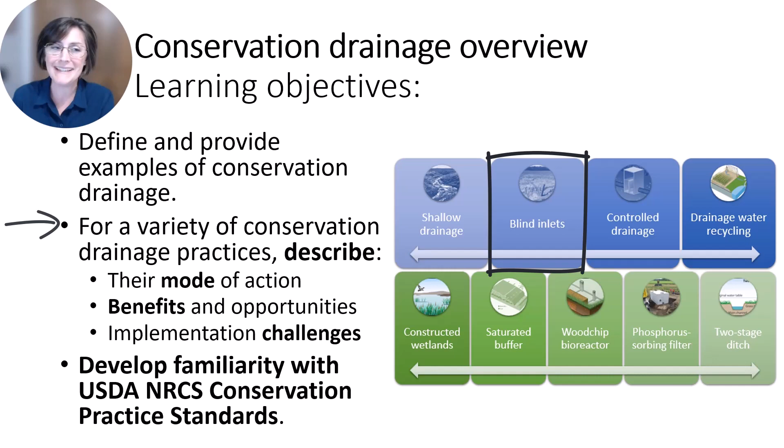We'll move on to our next conservation drainage practice, the practice of blind inlets. We'll also touch on the topic of NRCS standards. We talked about surface inlets, surface intakes, tile risers in previous weeks.

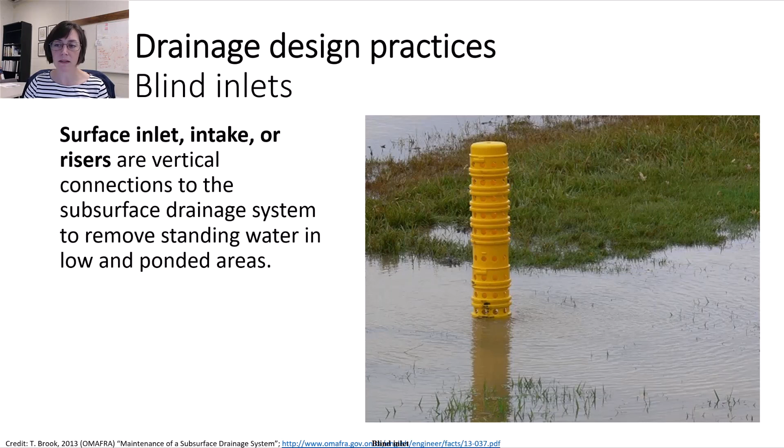The point with a tile riser or a surface inlet is that these are critical parts of our drainage systems because they're essentially direct connections from the surface of the field, from ponded areas, straight down to the tile drainage or the subsurface drainage system. That allows the wettest parts of the fields to drain relatively more quickly than if you did not have that

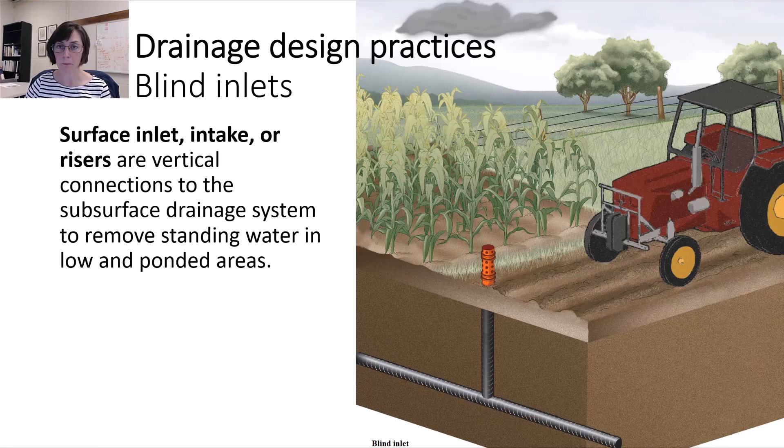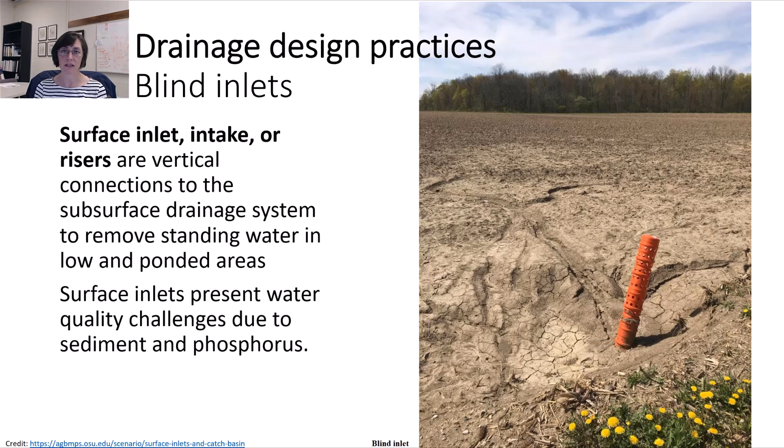direct connection there. Surface inlets also present challenges for water quality though, mainly because this is one of the main ways that sediment gets into our tile drainage system, which of course tile drainage water tends to be relatively clear unless you have a surface inlet present on your drainage system. In addition to sediment, we have sediment-bound phosphorus or particulate phosphorus that can get into our tile drainage system in this way.

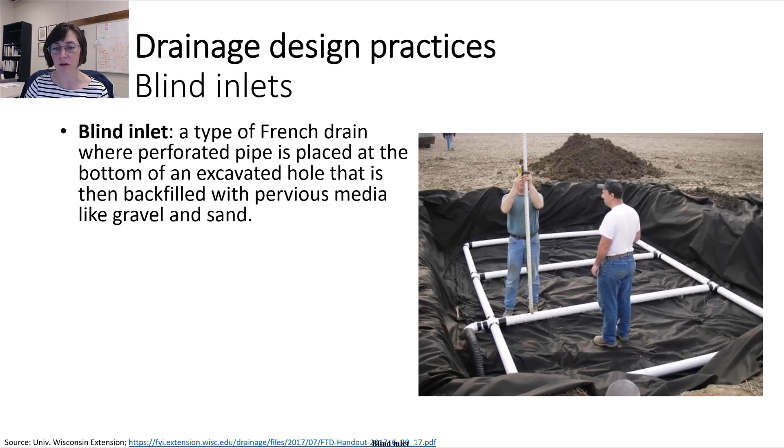So enter the practice of a blind inlet. A blind inlet is a type of French drain where a perforated pipe is placed at the bottom of an excavated pit that's then backfilled with pervious media like sand or gravel. The best way to describe this practice is to just walk through the construction of a blind inlet.

First, an excavation is made in the field around where the existing tile riser or surface inlet is, and you excavate down to the level of the drainage system. A geotextile fabric is usually laid in the bottom of the excavation, though that's not shown in this picture. And then you lay the collection pipes on top of that geofabric.

Those collection pipes you see in the picture, you can just barely see some holes in those collection pipes. This is the collection system to collect that surface ponded water that's infiltrated through the soil, collect that and route it into the subsurface drainage system.

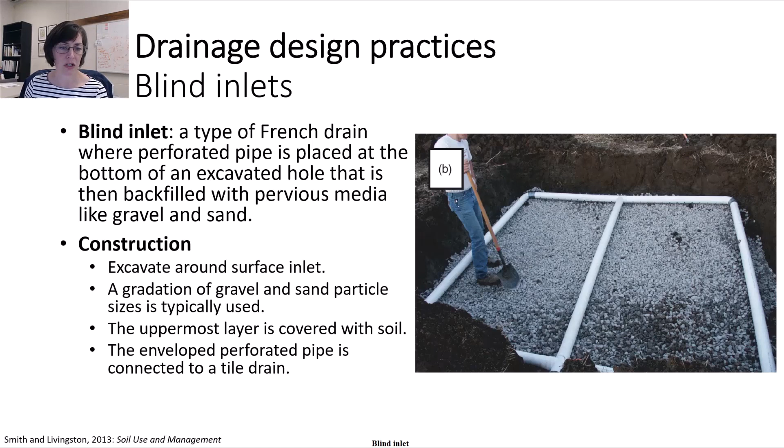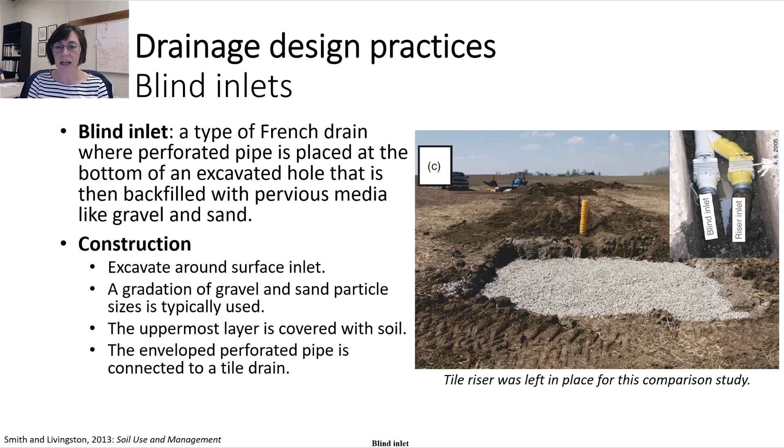On top of that collection system, you fill with gravel media, typically with coarser media, the bigger gravel at the bottom, and then smaller media as you fill up towards the top. And then for a blind inlet, the top is covered with soil. Obviously, that's easy to remember because once the blind inlet is done, we are essentially blind to seeing any kind of inlet because it becomes invisible in the field.

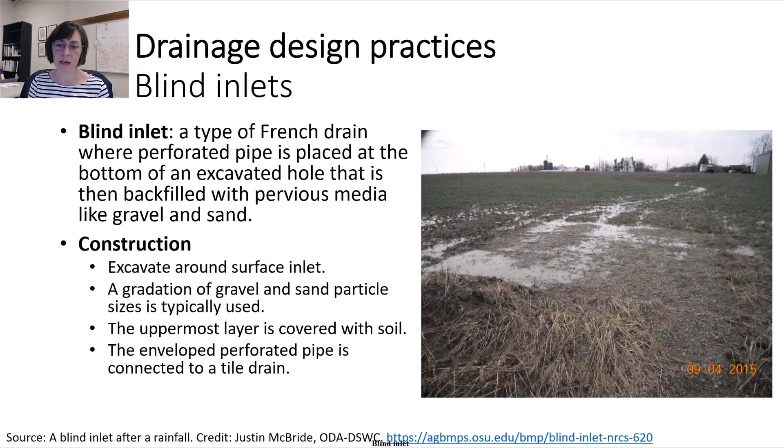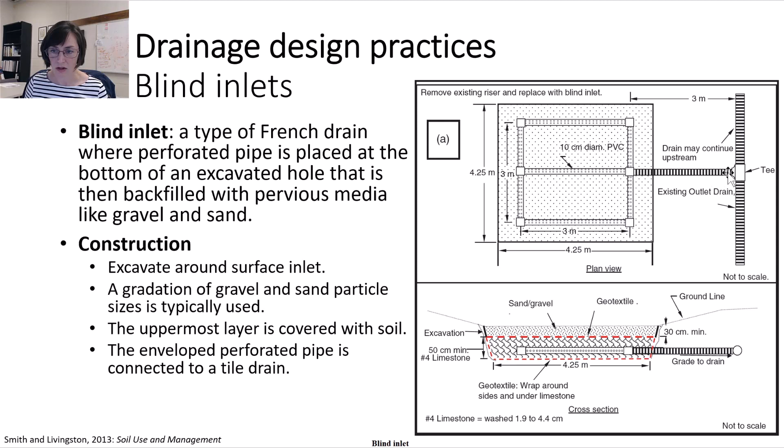Geotextile generally is used to separate the top sand or gravel layer from the soil, which goes on the very top of the blind inlet, and this illustration illustrates all those concepts nicely of the different media that are required. And of course the plumbing is all connected along the way into the larger existing drainage system.

The terms gravel inlet and blind inlet are often used interchangeably, although they are technically different practices. The difference is that at the time of construction of a gravel inlet, the uppermost or the top layer of gravel or sand is left exposed. You don't cover it over with soil. That's opposed to a blind inlet where you cover the top over with soil, so you don't really physically see anything in the field in terms of the inlet.

However, with a gravel inlet, when you leave the gravel exposed at the surface, over time the sediment that's coming from your field, from the surrounding depressional area, will cover over the gravel. So over time, gravel inlets essentially turn into blind inlets, but they are considered distinct practices because at the time of installation or construction, the practices are different.

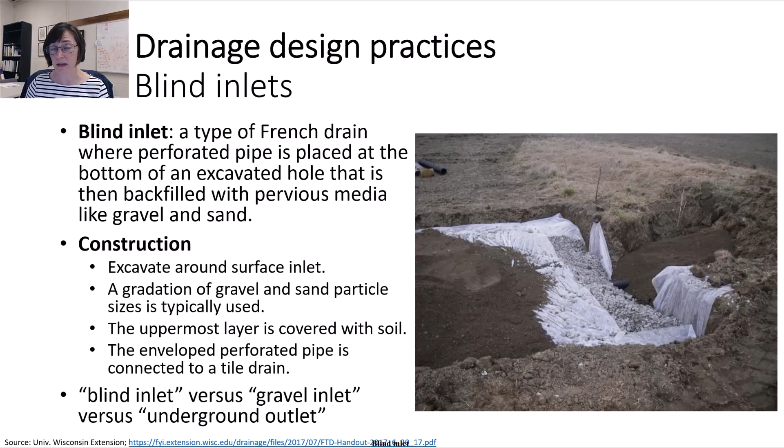An additional nuance here with terminology is that the NRCS provides federal incentive payments for the practice of blind inlets and gravel inlets under the Conservation Practice Code 620, which is called underground outlets. The nuance here is that the Conservation Practice Standard 620 applies more broadly to other types of inlets other than just blind inlets and gravel inlets.

And you can see the general purpose for Conservation Practice Standard 620 is a little bit more general than just applying to blind inlets. The purpose of this Conservation Practice Standard is, again, more broadly to just convey ponded surface water safely rather than that water causing flooding or erosion.

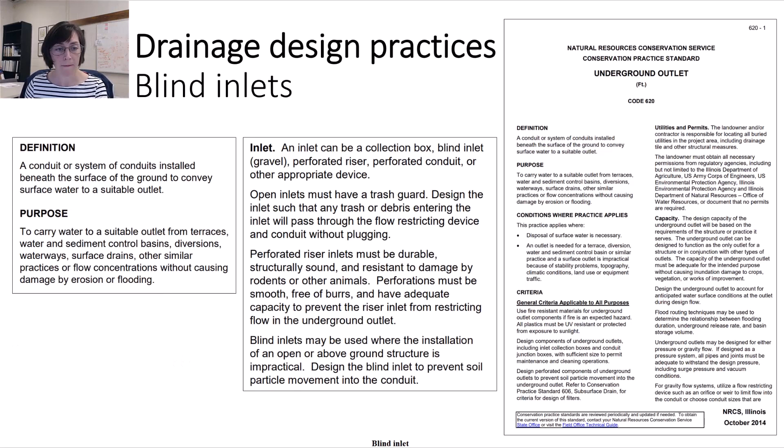The idea of a blind inlet, in my mind, really fulfills the purpose or the intent of the idea of conservation drainage. Blind inlets do the same thing that a surface inlet or tile riser does, helping to drain quickly the lowest parts, the ponded parts of the field, but it also adds an additional benefit of trapping sediment, so that sediment's not getting into the drainage system. This is a good balance between meeting agronomic goals and meeting environmental goals, which is what the idea of conservation drainage is all about.

There's also an additional benefit in terms of agronomy or infield management, because you don't have to farm around those tile risers anymore, so you don't have to worry about hitting those with your tractor. I also think there's an additional benefit not listed here. There's less sediment that gets into your tile system, so there's less potential for clogging or reduction in flow capacity due to accumulated sediment in the tile pipes themselves or the drain pipes themselves.

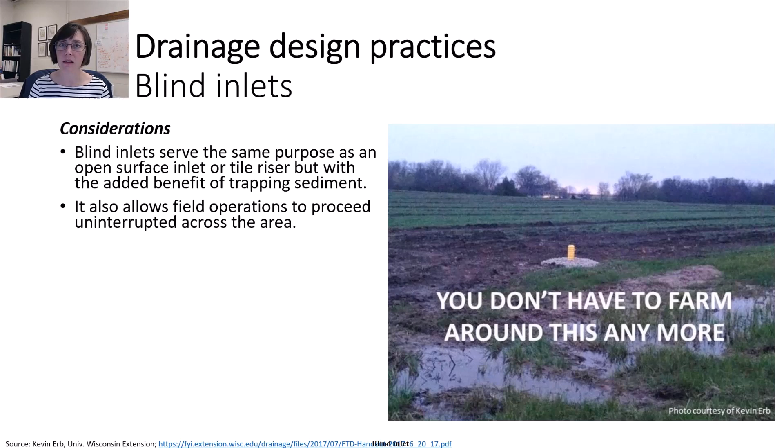Blind inlets are a pretty easy practice, low maintenance with an estimated 10-year life. The cost of the practice depends on the size of the blind inlet that you construct and also the availability of materials like the gravel and the sand. But generally, these blind inlets have been running between $1,500 and $3,000.

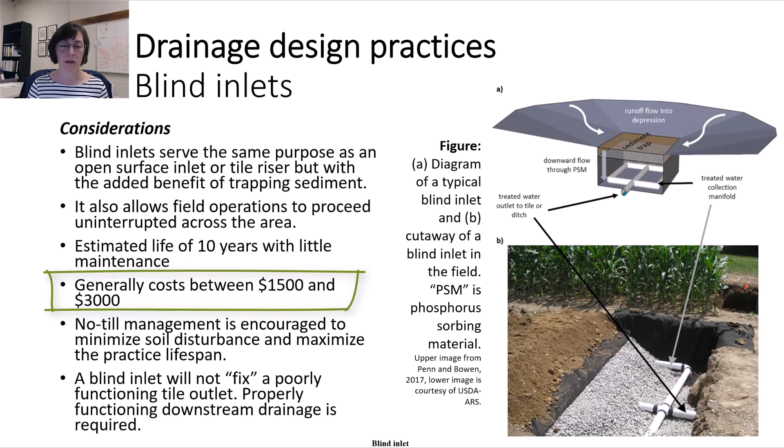The mode of action, or the mechanism for how this practice cleans water, should be pretty obvious. The gravel filters the sediment out from the water as the water flows through the media. It's just a physical filtration process. This means the sediment accumulates at the top of the blind inlet rather than flowing through with the water and getting into the subsurface drainage system. I like this from a holistic standpoint because you're keeping the soil in the field. The soil might have moved a little bit from its original location in the field, but you're still keeping all of the soil in the field.

There is an important nuance here in terms of water quality, in that the addition of a blind inlet to a field that did not already have a surface inlet or a surface intake or tile riser will actually decrease water quality. So just on its own, in any context whatsoever, a blind inlet is not necessarily a water quality benefit. A blind inlet provides a water quality benefit if you're using it to replace an existing tile riser or an existing surface inlet. In that case, there is a water quality benefit because you're reducing the amount of sediment.

However, if you don't have an existing tile riser or a surface inlet, and you have a ponded area and you put a blind inlet in, you will actually increase the amount of sediment compared to not having any sort of inlet structure present already. So from a water quality perspective, the benefit of installing a blind inlet is only realized when the blind inlet replaces an existing, what we call open inlet.

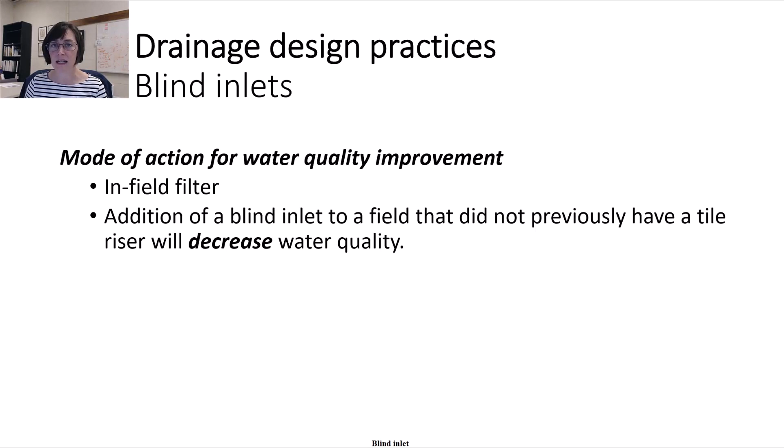But unfortunately, there hasn't been a whole lot of research done on blind inlets, especially research with good valid controls, because it is a practice that you have to construct at the field scale, so it's hard to have a control unless you have many, many years of monitoring at paired sites. The study design gets complicated.

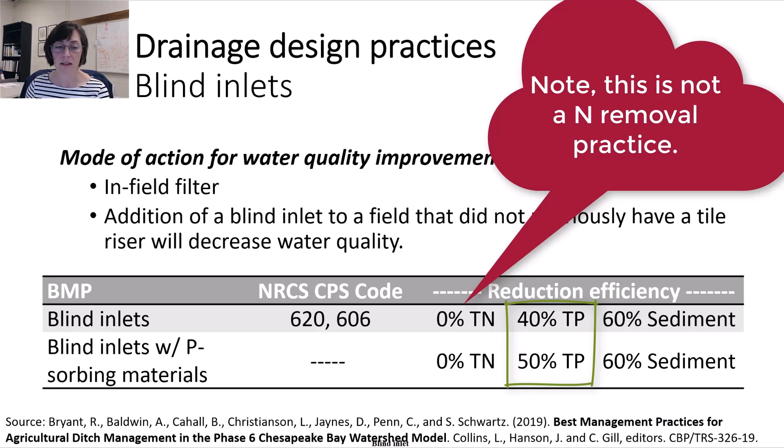Moving to total phosphorus reduction, most of the total phosphorus removed for the regular blind inlet case, the 40% TP reduction, is due to filtration of particulate phosphorus that's associated with the sediment. But if you do the more advanced option of using a phosphorus-sorbing material mixed in with your gravel or your media, you do get some additional removal of dissolved phosphorus due to that phosphorus-sorbing media that holds on to dissolved phosphorus. And that's why the TP reduction efficiency is higher for the more advanced option, 50% versus 40%.